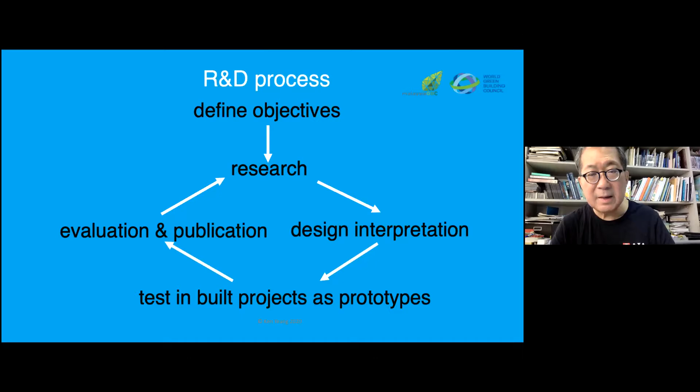Now, I see green design as the bio-integration of 5 factors. The first one is nature, which is seen as an infrastructure, and the objective is to design with net positive ecology impact. Second is human society, our social, economic, political system, and the goal is to design for a net happiness society.

Next is water. We try to design for net zero water without waste of water. Now, water—we have lots of it in the sea, but it's not potable, not drinkable. So we need to make sure that the water that falls on the ground stays on the ground, and that whatever we use, we try to close the loop.

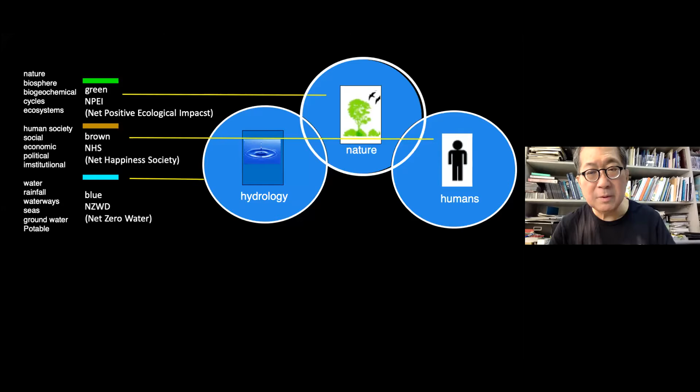Then there's our built environment, which is the infrastructure—the external infrastructure, and inside the building is also infrastructure, except that inside buildings it's hidden. This also includes everything that we make: our buildings, our bridges, our ports, our clothing, our food, and artifacts and things like that. And finally, energy, because we need energy for society.

Now, these are the 5 key infrastructures that we need to consider in ecological design. The challenge then is bio-integration—how do we bring all this together into a whole? And that, in a nutshell, is what ecological design is about: nature, our society, our built environment, water, the hydrology, and our energy systems.

Now let's look at nature first.

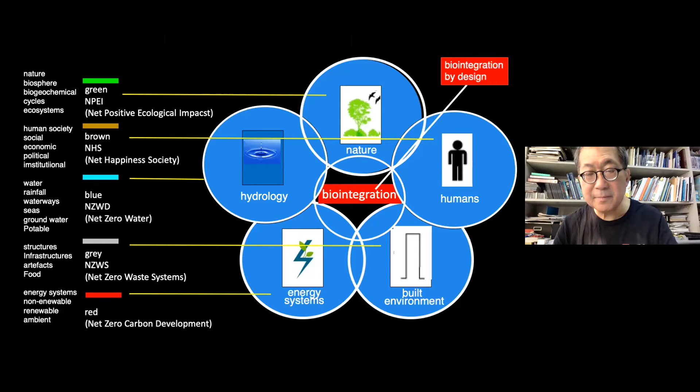Ecology sees the Earth as covered by a thin film, the blue color you see there, which is the biosphere. Within the biosphere, there are whole units in nature called ecosystems, which consist of communities of plants, animals, and the physical environment. Ecologists call this the biotic and abiotic constituents. In nature, everything acts together to form a whole.

Now, if you look at the room that you're in, or any city, whether it's New York, Tokyo, Singapore, or Kuala Lumpur, the biotic constituents are missing. This explains that the functions nature does for us—sequestering waste, emissions, producing oxygen—are absent from cities. We have little patches of green here and there.

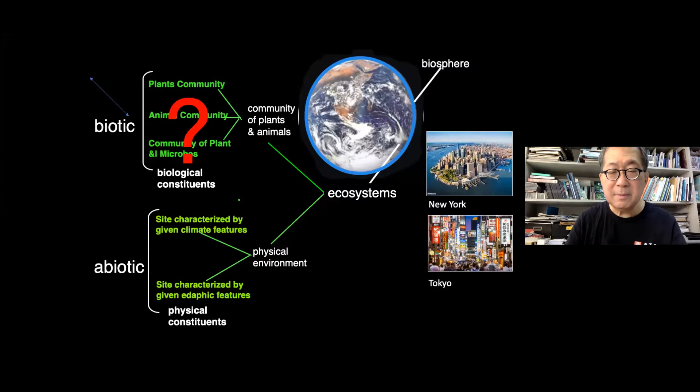In Kuala Lumpur, we have the Lake Gardens and a bit of the KLCC and so forth, but a good part of Kuala Lumpur has no nature. So if you're going to design our cities and buildings as constructed ecosystems, then we need to have the equivalent of this in our built environment.

The idea was that if our built environment is constructed, designed and built as a human-made ecosystem, then the biointegration is less arduous, less complicated. What we need to do is convert what we have today and try to build new buildings as constructed ecosystems.

Now, obviously, this is easier said than done, and it is actually the principle of what we should try and do.

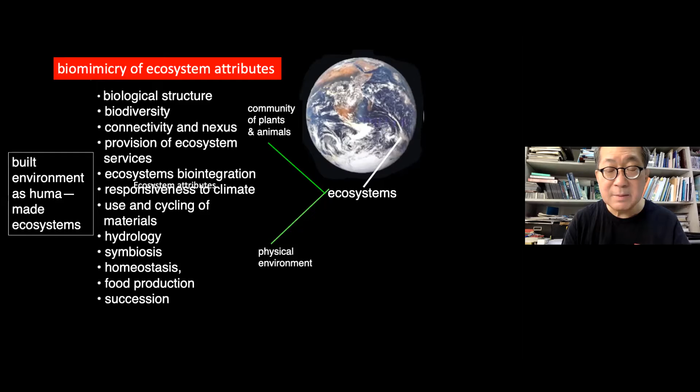So I start to look at how do we design the built environment as human-made ecosystems. I started looking at ecosystem attributes, and these are some of them: biological structure, biodiversity, connectivity, nexus, ecosystem service, and so forth. It's a long list, and I've been trying to do as much of this as I can in my research.

Now let's look at the first one, which is biological structure, which I discussed earlier on. These are some of the ways we can bring nature back into the city.

The first diagram is a centralized one where we put it all in one location, as in Central Park in New York. The second is a spotty, dispersed relationship, has a series of green squares, as in Georgian London, or you can see in the second diagram below, you can have patches of green all over the building.

The third is what I call a stepping stone. It's not quite connected, but close enough that species can move, but not all species, from one patch to another. The fourth is the spine, where you have a central spine and fingers sticking out. The fifth is ecological corridors with fingers.

Now, ecologists see the last one as the preferred one, because by being connected it enables species to move from one part of the green areas to the other, so that the whole system becomes an ecological system by being connected.

It enables a larger pool of natural resources within this ecosystem to be shared among the species. And the species, by having a larger pool of resources, is more stable, and as they're more stable, it has a greater potential for survival. So with that as the key diagrams, I started to use it to try and interpret this in my work.

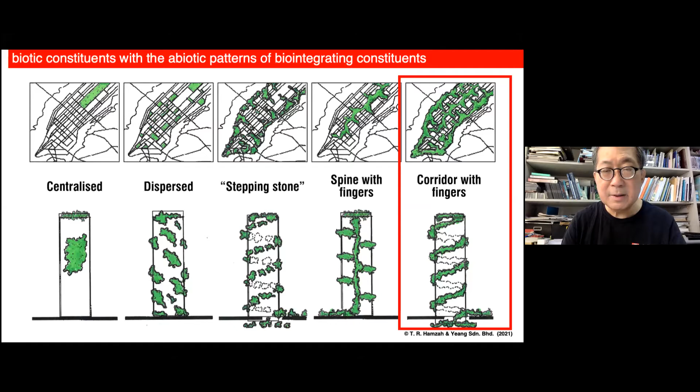Now this is the Solaris building that we completed around 2010. The idea was to have a continuous spiraling vegetation that goes from the ground in the basement going up to the top of the building.

This was a concept perspective I did to show how it could work. Now, if you just put vegetation on the outside, to service the vegetation you have to go through the floor. So I thought that's no good because people wouldn't like it. So what I did was provide a ramp next to it so that people can service the vegetation from the outside.

That's very important because it irritates people no end if, every time you service the vegetation, you have to get permission to go through the floor and bring the fertilizer, water, tools, through the window to get to the vegetation. But here you can service the entire vegetation from any part along the ramp. The ramp then becomes, if you like, a vertical linear park.

And if you extend the ramp horizontally, it's about 1.3 kilometers long, this building. So here it is, it's completed. It took me a year or so to get complete. You can see the vegetation, you can see the ramp, and people servicing, and the sun shading on top.

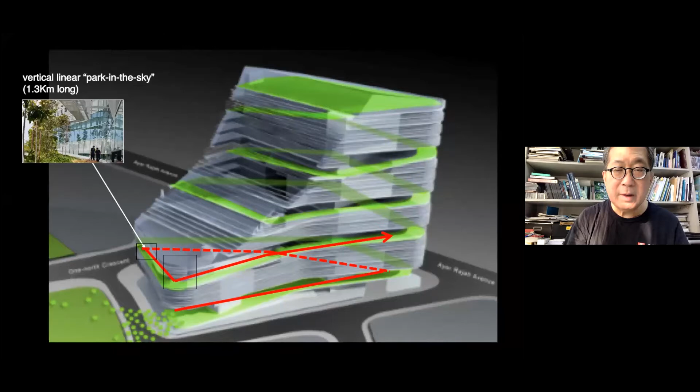The idea was to ramp all the way up the building. With every floor, with every facade, I could climb one floor. It goes continuously up to the top of the building. There are certain parts where the ramp is a little narrower, and inside and outside the building it goes up as well, one floor at a time.

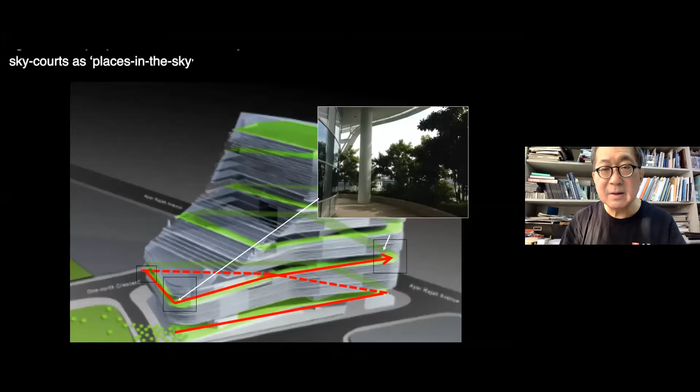As a linear park, I wanted to create places of respite. So at the corners, I have sky terraces so that people inside can go outside, and people on the ramp can have a little mini plaza. These are spaces for interaction, and it also avoids the monotony of a long linear corridor.

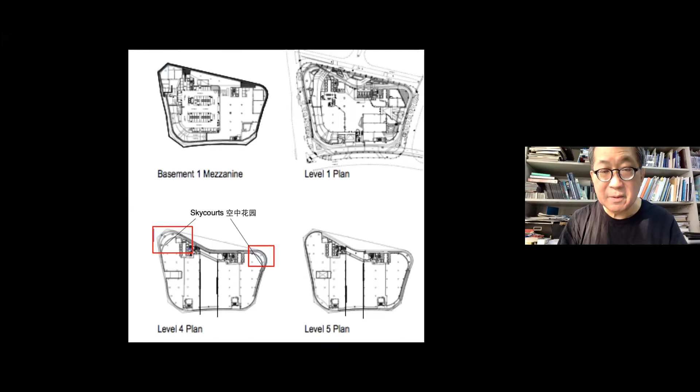At the corners, you can see in the red square these sky courts where the ramp joins the typical floor. Here's another view of the sky court at the corner. People go there for a smoke, to have breakfast, a meeting, or just to chat with each other—these are actually very nice spaces for people to use.

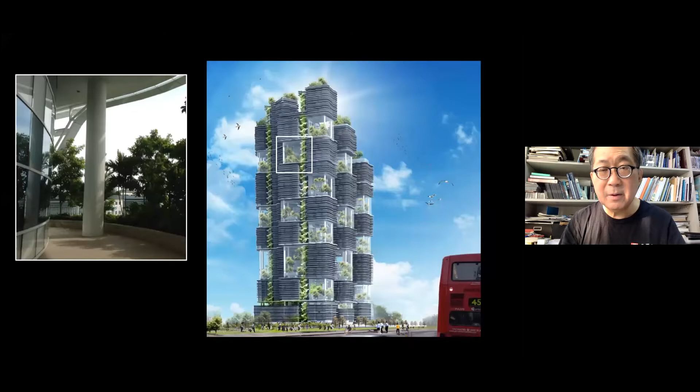On the right-hand side is a tower we are working on now in London, where we have sky courts that move, alternating between different parts of the building.

Singapore has this thing called the Vegetation Index, which is a ratio of vegetation to the ground area of the site. The requirement is 6, and we achieved 12.2, probably the highest in Singapore. This means that criteria like Green Mark, GBI, or LEED should be based on performance rather than just meeting a minimum, and we should try to exceed as much as we can—here we exceeded 6 by more than double, reaching 12.2.

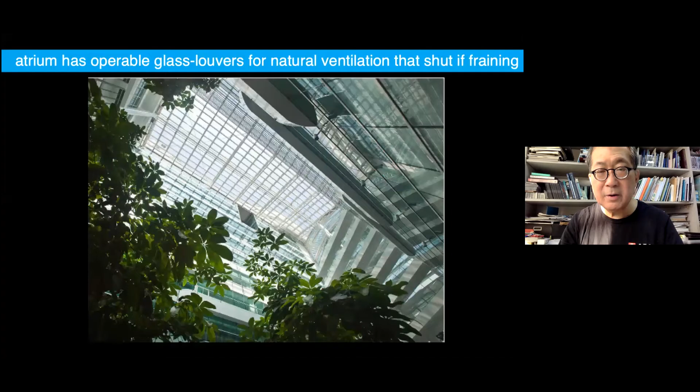The atrium is naturally vented, not fully air-conditioned, and not fully naturally ventilated either—it's what I call mixed mode, where some cool air is blown in. This reduces the air conditioning load for the entire building. You can see the atrium roof is operable: on a normal day we open it to let hot air out, and if it rains, it closes and seals the whole building from getting wet.

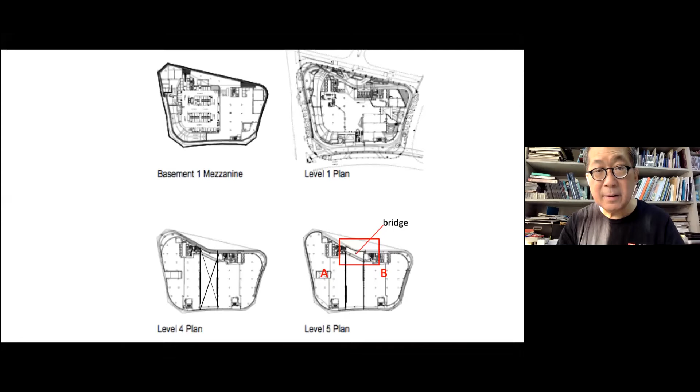That's the bridge. Another experimental device we adopted in this project is the diagonal light shaft. Most light shafts are vertical, but here I cut a diagonal shaft that goes all the way down to the bottom of the site, so that people walking down the street can look up and see the building, and people inside the floor can look down and see the street.

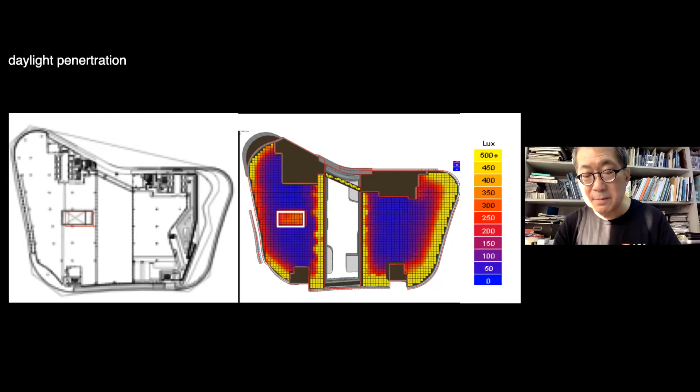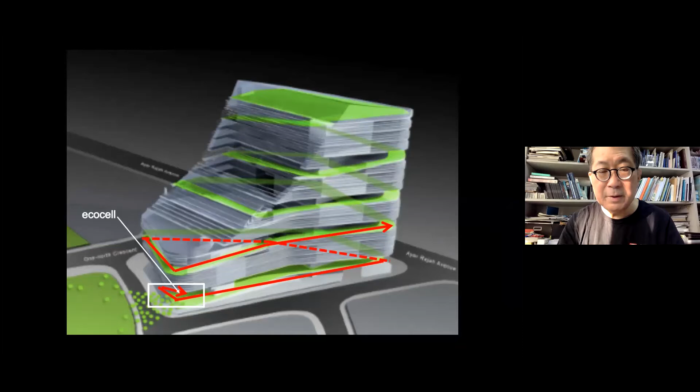At the bottom of the ground floor, we have what we call an Ecocell, which brings water into the lower parts of the building. So this is what the Ecocell looks like. And at the bottom, we have the water tank. Ideally, we could have a bioswale there to bring water back into the ground.

So now, connectivity and nexus is one of the ecological attributes. In nature, everything's connected, whether overtly, inadvertently, or inexplicitly, and we should try to enhance this connectivity. What human beings do is that when we enter a site, we chop it up, fragment it like cutting a cow into a burger, and the connectivity in the habitats is lost—we fragment the land with impervious surfaces, fences, and buildings. So one of the things we need to do with any city, with any building, is try to enhance its connectivity.

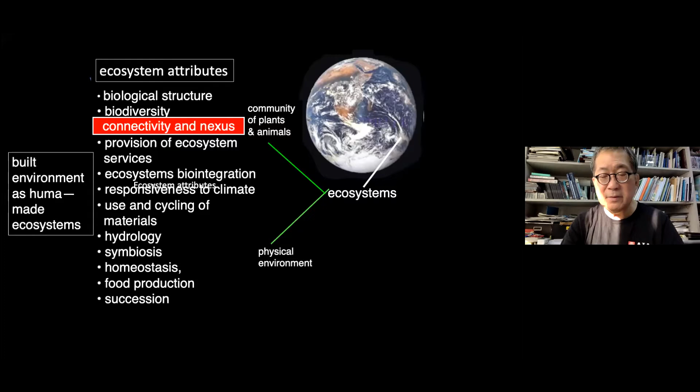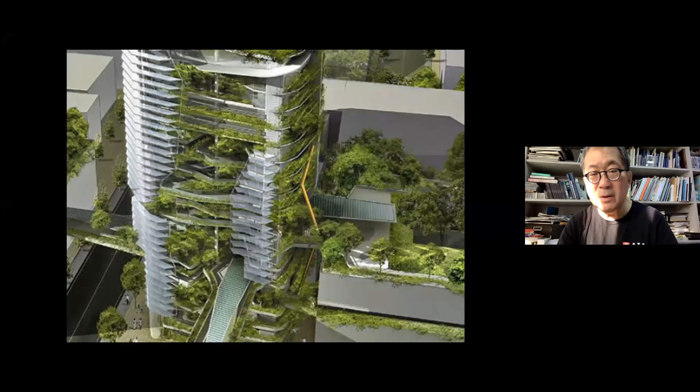And this is the plan showing the continuity of the vegetation going all the way up. The idea was that whenever the vegetated ramp reaches the same level as the roof of the adjoining building, we bridge across to the roof and green it, so that the building becomes the catalyst to make the city green.

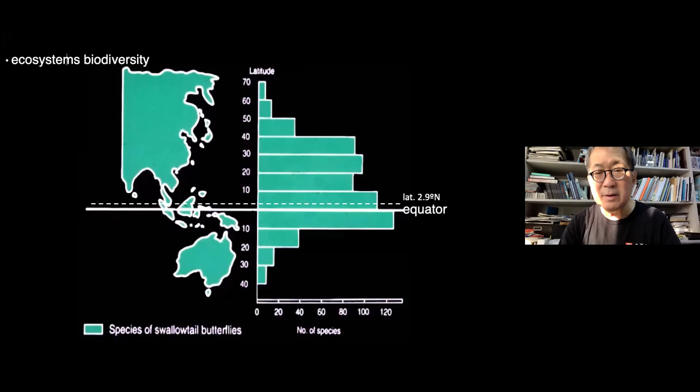So we started to develop ways to enhance biodiversity, and this is what we call—developed with ecologists—the Biodiversity Matrix. Let me explain what this is. The first thing we do when we design any building, project, development, or master plan is to create habitats within that development. It can be on the ground, underground, on the walls, in the sky courts, or on the roofs. So creating habitats is very important.

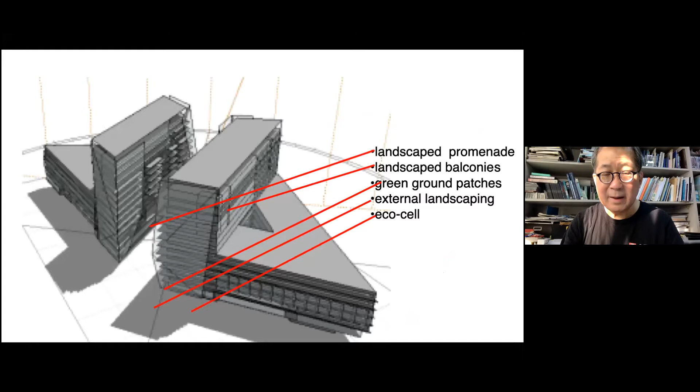So these are some habitats in this project in Putrajaya. The project is really two almost symmetrical buildings, bifurcated by the axis to the Millennium Monument. Here it is—it was completed about three years ago, and you can see the habitats on the facade and the sky court. This was before the vegetation was fully grown, and there's vegetation on the ground.

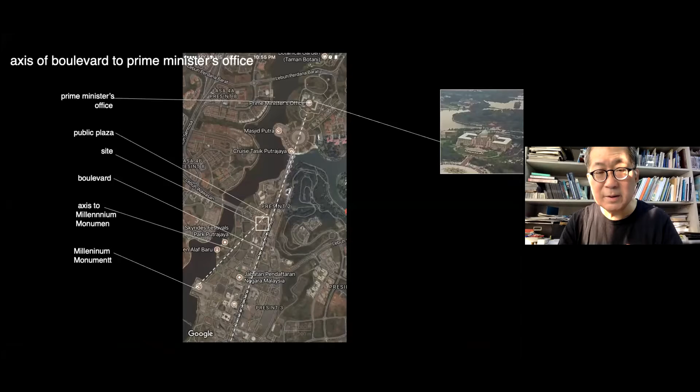The site is determined by two main axes. The first is the boulevard leading to the Prime Minister's office. The second is the axis from the square, the Dataran Merdeka, down to the waterfront, where the monument is. With these as determining factors, we started to shape the building, and you can see that the axis down to the monument slices the site into two. Just next to it is the new Putrajaya building designed by Philip Cox, and you can see the Prime Minister's office building along the boulevard. This is the axis—so the axis cuts the site.

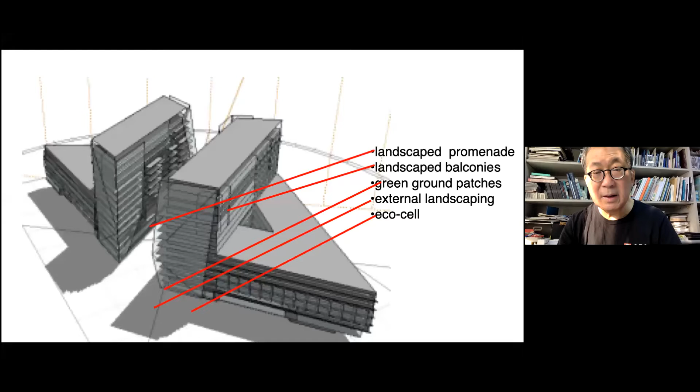Now, the space between the buildings, we created a pleasurable zone where people can sit, and we have vegetation on this area. Again, the habitats are in this location. So these are the habitats we created in the development.

You can see there's a plan, and the red color shows the habitats. The first thing we did was to select what fauna we want to bring back to the location, because the site was just ravaged, cleared, and red earth, cleared of any living life except the microbes in the ground. With this plan, because of the shape of the site, we had two almost symmetrical buildings with a promenade in between, each with their own drop-offs and an atrium between.

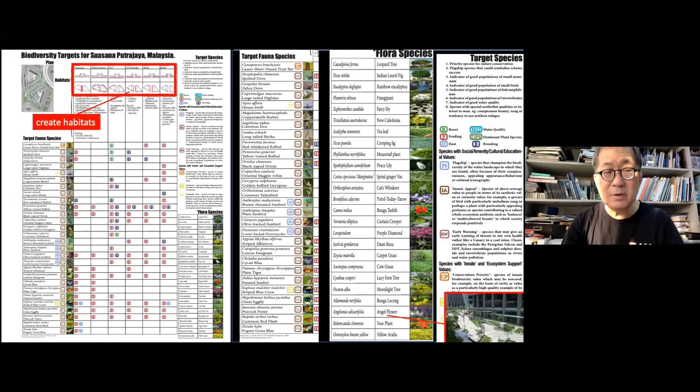So the first thing we did was create the habitats. Next was to identify the species of fauna we want to bring back into the project, which are not hazardous to the people in the locality. After that, we try and look for the flora that will attract the fauna - the fauna will not just come, we need flora that attracts it. Then we look at the interaction between the habitats, the flora, and the fauna, and that becomes the basis for designing the habitats and landscape areas.

So this is what we call the biodiversity matrix, and this is what makes the project ecological, taking ecological green design to the next level. This was done as a collaboration between ourselves, the ecologist, and the landscape architect.

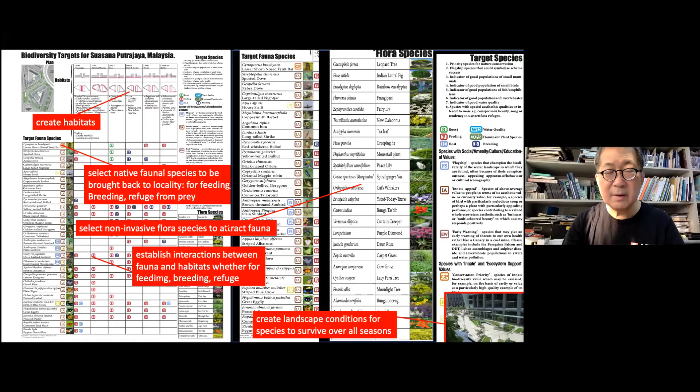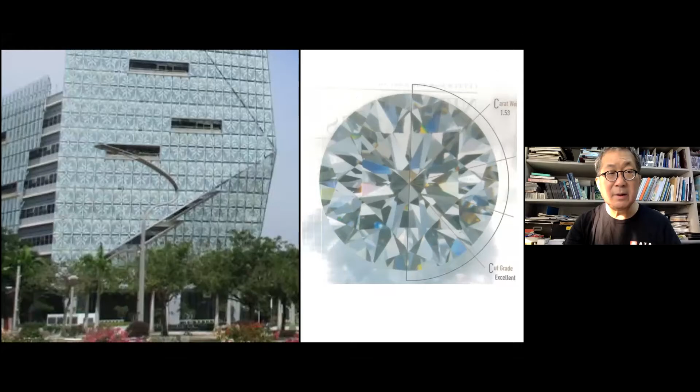Now, this interesting bit of facade - we wanted to create a faceted facade as a high-end looking facade, like a diamond, like a gem in the locality. Hence its faceted shape. But we wanted to break up the facet, so we sliced it, cut voids in the slices, and took sky courts in between. And between the outer skin and inner skin is a walkway for servicing.

But you can see the panels are not butt jointed - they actually have an air gap so this becomes like a flue for air that flows through and cools the facade. Here it is, you can see the slicing of the facade and the sky courts.

Now the pattern is what we call a songket pattern, to express the Malay culture, reminiscent of the songket fabric. We could do more, but we just took the pattern as the basis for reflecting the culture of the country.

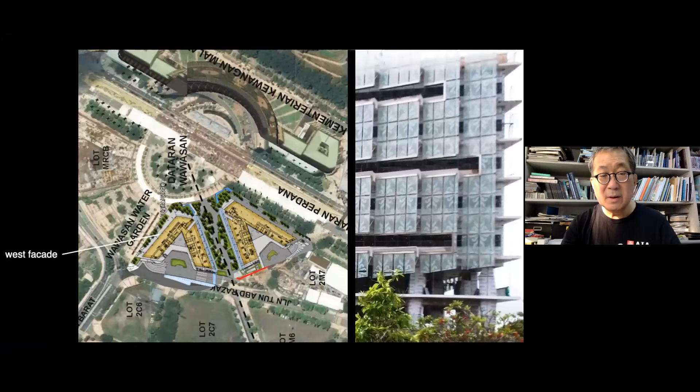So here it is, and on the right-hand side is the west facade. We shaped the west facade to keep out the western sun, so it's not exactly flat. This is the entire west facade, which is actually quite interesting. You can stand at the sky court and look out and see the highway on the other side of the river.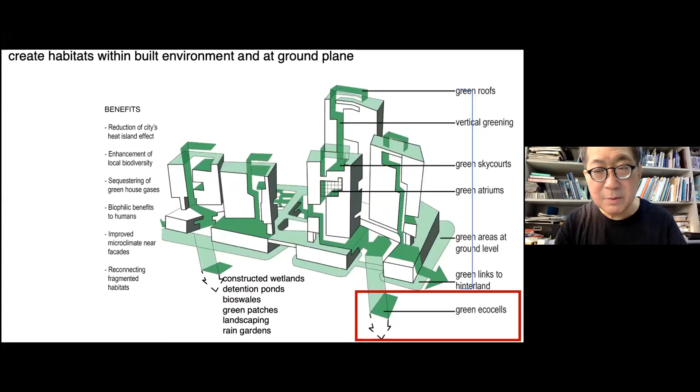So again, here we brought the habitats all the way down to the ground, into the basement, using what we call the Ecocell. It goes down from the third floor vegetation, weaves its way down to the bottom, and hits the basement, bringing natural ventilation, water, and daylight into the lower parts of the building.

The vegetation idea, the Ecocell idea, started maybe about 10 years earlier. This was a competition scheme for the Kowloon waterfront. It was a controversial scheme, and the controversy is a separate story altogether. But anyway, I think we got honorary mention and not the first prize. But the idea of the Ecocell started in this building.

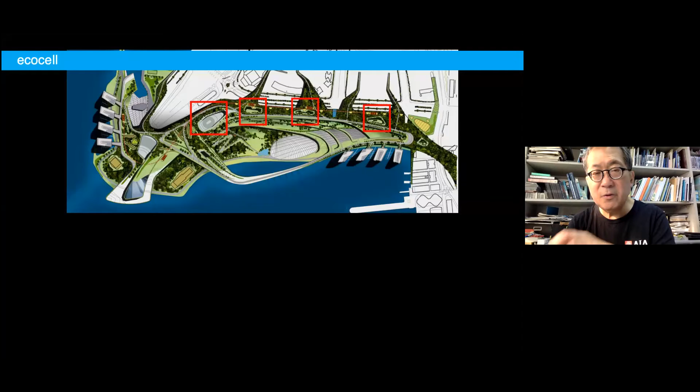The podium - we cut voids going all the way down to the basement, and the voids do a number of things: bring vertical integration into the lower parts, opportunities for rainwater harvesting, natural ventilation, and daylight penetration. At the bottom, we could have a bioswale or an eco-machine, the ones that John Todd invented. So this is the function of the Ecocell.

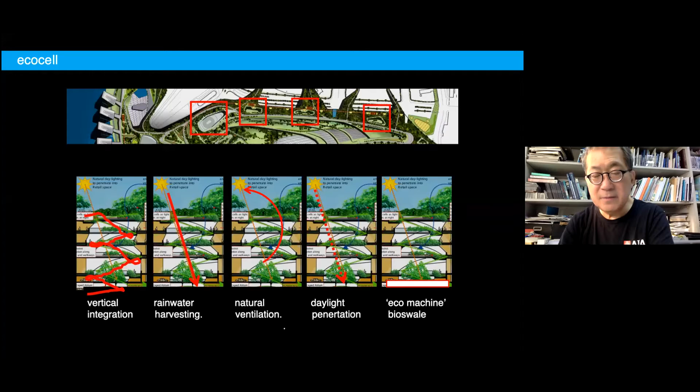Now then, how do we address this with the vertical building? How do we create habitats within the vertical building? Early on, the principle was to link everything together horizontally to create an ecological nexus. People sometimes ask me, how do you make Kuala Lumpur green? And I said, the first thing you need to do is create more green areas and connect them, because that creates an ecosystem within the city.

And so that was the idea. But when you hit the base of the building, you should try and bring the vegetation all the way up. So the idea was that we should extend the vegetation vertically into the sky.

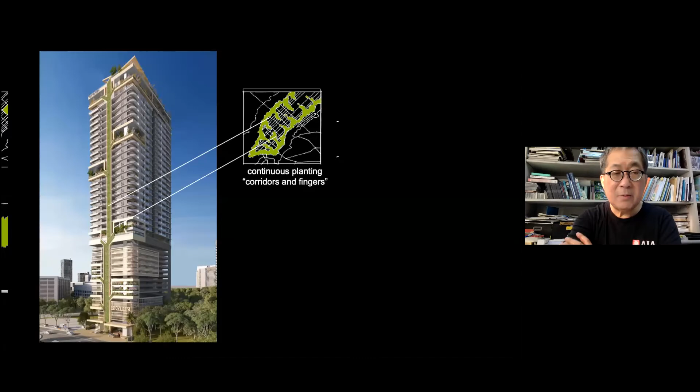This is a building under construction now, which has a green wall as continuous planting going up. When it hits certain levels of the building, we have a sky court. These are spaces for respite for the users.

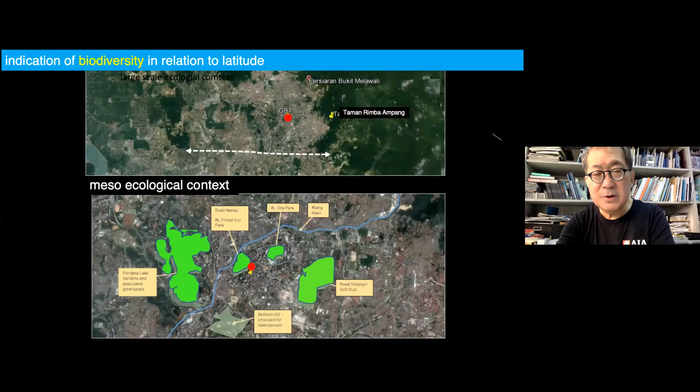So the approach was to bring back birds and invertebrates into the site—invertebrates being species with no bones. For the lower floors, we designed it for butterflies and dragonflies, choosing species that will attract them. For the middle areas, we have spaces for songbirds, and the top area would be a space for migratory birds.

That flows across the site. But it's important to have a water feature because water attracts birds to the different zones.

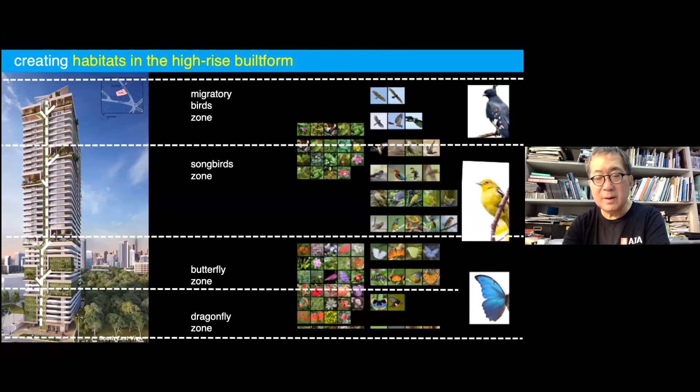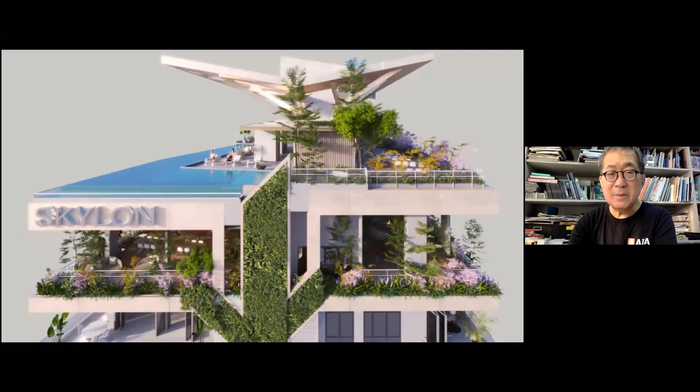So this is the biodiversity matrix for the project, and you would use that—that's the top of the building with the infinity pool. This was the basis on which we designed the landscaping and the planter boxes in the building.

Now, next is the provision of ecosystem services. I'm sorry, I doubled the word provision there.

Ecosystem services is something that ecologists concluded around the year 2000—a list of things that nature does for us without any human intervention. This is very important because the more we cut nature, the more we make nature homogeneously abiotic, the more we lose the potential for ecosystem services. These are the things nature does without any human intervention.

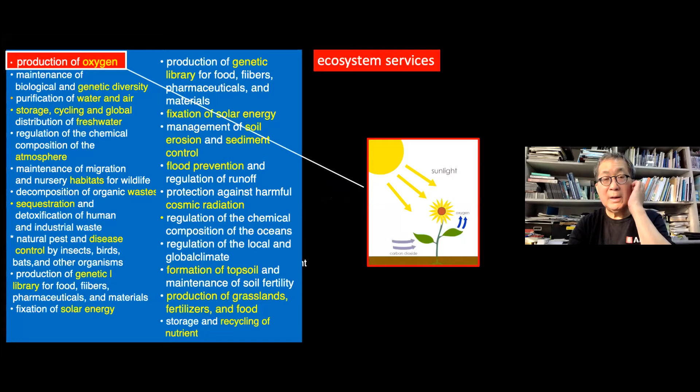If you look at the top left-hand corner, there's the production of oxygen. Nature, through photosynthesis, produces oxygen. Nature also absorbs and sequesters pollution from the air. Now, we didn't ask nature to do this—nature does it for us without any human intervention.

So you can see the importance of putting greenery in the city, of making our city as biotic as possible, of redesigning and changing our city so that we have nature to balance the pollution we emit into the air, and to create oxygen for a healthy environment.

And so the idea occurred to me that this is too big a task for us to do. We can never replicate what nature does with photosynthesis—it's a huge effort. We can never replicate the sequestering of contaminants in the air. So the idea was then to create habitats woven in close proximity to urban areas.

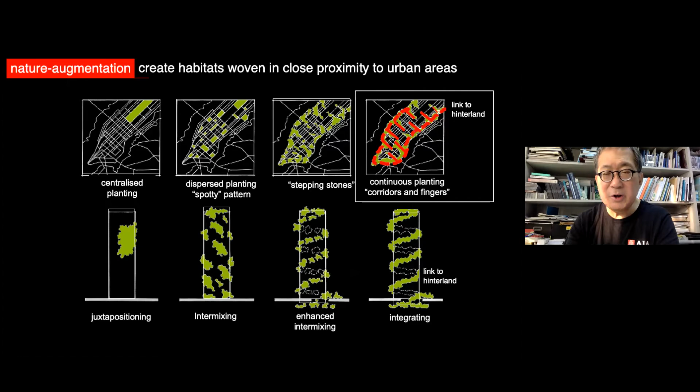I call this nature augmentation—using nature to augment the capability of a locality to provide ecosystem services. This is extremely important, because without it our cities become contaminated, unhealthy areas for people, and very soon there won't be any vegetation left on the planet at the rate we are building, changing, and cultivating land for all sorts of purposes.

So the idea was to weave the green corridors and green areas with the built-up areas in a sort of clasp-hand concept. You can see the ecological fingers that stick out into the sea, and the ecological corridors that weave inland into the green context.

This is a project master plan we did at the island of Reunion, which is east of Madagascar, and it's a French territory.

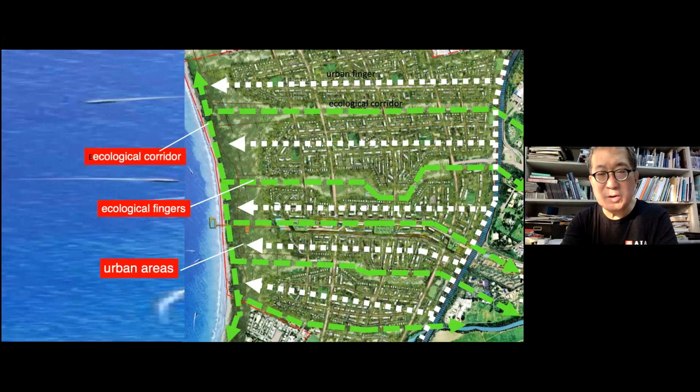So the idea was that we collect all the species at the waterfront, because the buildings have to be set back a certain distance from the waterfront. And then we bring it through a series of ecological fingers, and the urban fingers then go all the way down towards the waterfront. So you can see that...

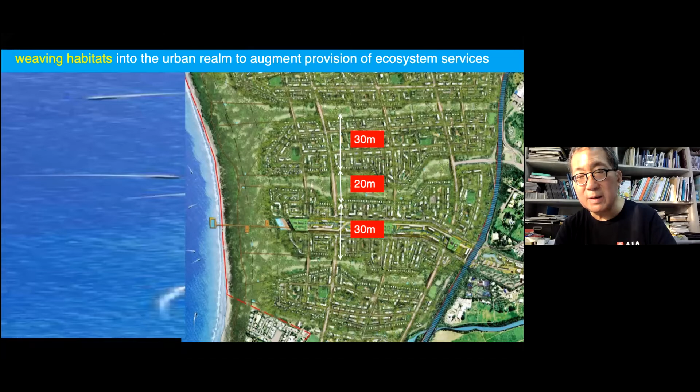But here it's cheek by jowl with the urban areas right next to it. We thought about 30 meters would be more effective, and the green fingers could be 20, and so forth. And the edges should be serrated, not pristine, because species like serrated edges—they can hide, they can breed, they're less exposed, they're protected.

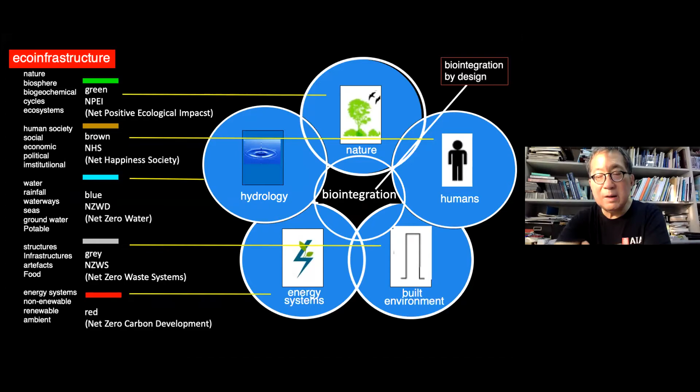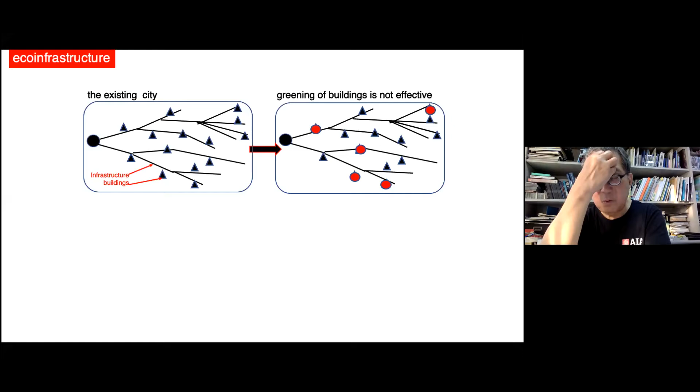Because if you have a building where the water comes from the ground source, or the energy comes from burning coal, and so forth—what it means is that we should start with the green infrastructure, not the green building. Then anything else we add to it can become potentially greener. So this is a very important idea: that green architecture is not designing green buildings alone, but designing the green infrastructure. That is what we should start with.

This is the master plan we did in Bangalore, India. There's a forest reserve on the west side of the site. The first thing we did was try to link all the vegetation together into a master plan, into a spine, and then stretch the spine across the site—that's the ecological fingers. So the scheme is to bring it right to the edge of the site, hopefully extending to adjoining sites. That's difficult to control; it's up to the authorities to insist on that. But that's a start.

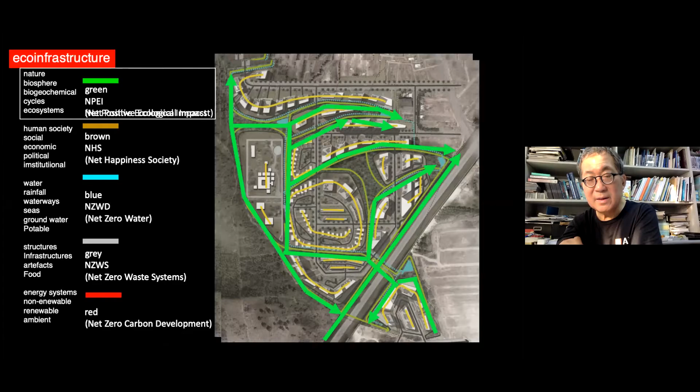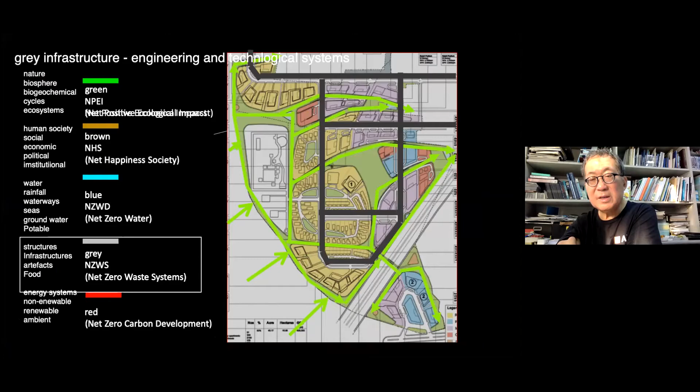Here's the water infrastructure, where all buildings have a water system that they're connected to. And here's the energy systems, the red energy systems.

For hydrology, the white squares show the detention ponds where surface water is retained on the site. We should try to close the loop as much as we can within the built system, and if it discharges outside, it should go back to the ground to recharge the groundwater. On the right-hand side are different means of doing this: infiltration planters, permeable paving and rain gardens, infiltration bioswales, rain gardens, or stormwater wetland areas. That's very important, because if you don't, the water goes to the drains and into the sea—it's gone forever, we can't use it.

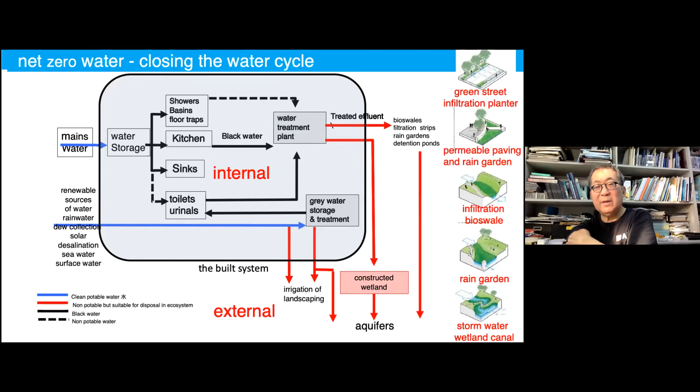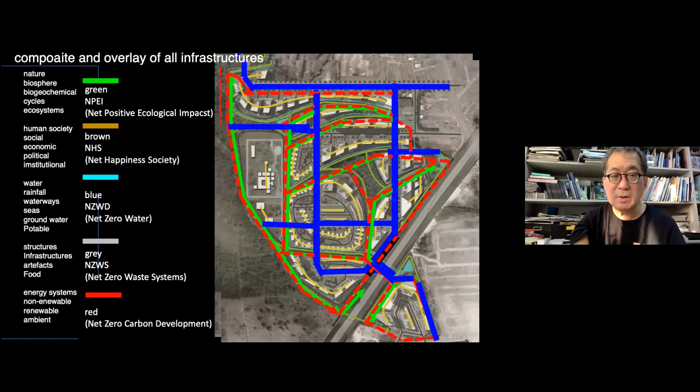For the black wastewater, we propose constructed wetlands, so the gray and black water can flow from one pond to another, and by the time it reaches the bottom, it is almost potable. So in a nutshell, this is a schematic concept of how we could bring all these four infrastructures into a whole. It's not perfect, but we're still working on this.

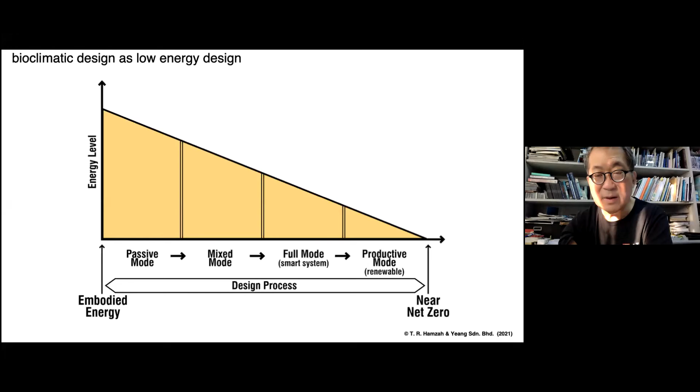Now, with this quick summary of the different ways of reducing energy, if you look at the graph, you start with passive mode. That means improving energy conditions without any mechanical electrical systems. Number 2, the next stage is mixed mode, then full mode as smart systems, and finally productive mode, which is renewable source of energy.

For temperate climates, this is what the comfort profile looks like. The engineers insist that we have a consistent temperature, humidity, and air change throughout the whole year. This is the red color line. The blue shows the comfort conditions in winter, when it's cold, and in summer when it's hot.

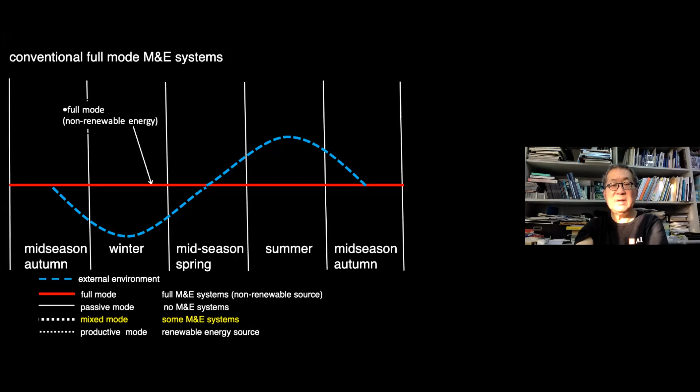Now, by using passive mode, using bioclimatic design, we can improve the comfort conditions without use of any mechanical electrical systems. But you can see that it's a long way off from the red line. You can never replace mechanical systems, high energy systems, by passive mode. We can improve it a little bit, but not that much.

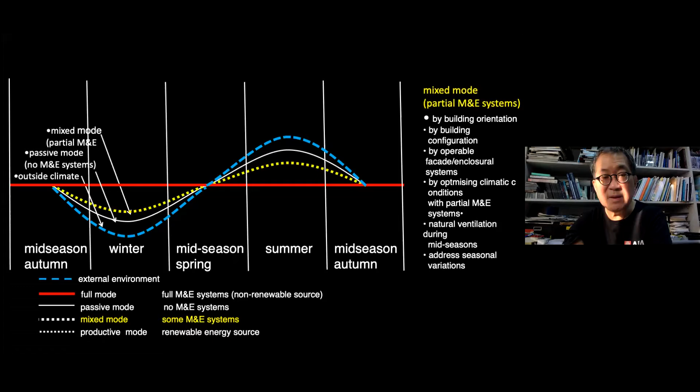The next is to use mixed mode. Mixed mode means some mechanical electrical systems, just like, for instance, passageways can have ceiling fans instead of air conditioning. Toilets can use ceiling fans, and so forth. This is mixed mode, some mechanical electrical systems. Here is what I call environmental mode over the mid-seasons.

Then the next would be productive mode. Productive mode, where you generate your own energy through using renewable sources of energy.

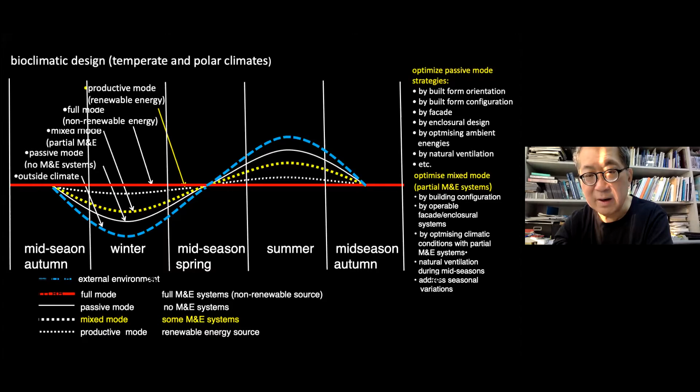Here's an example of a project in London, in a temperate zone. In a temperate zone you have two opposing seasons: a very cold winter and a hot summer. In between, you have mid-seasons like spring and autumn, which are very nice seasons. So the idea was to try and reduce the need for air conditioning in summer and the need for heating in winter by extending the mid-season. By extending the mid-season through natural ventilation, it reduces the period for cooling and heating during the summer and winter months.

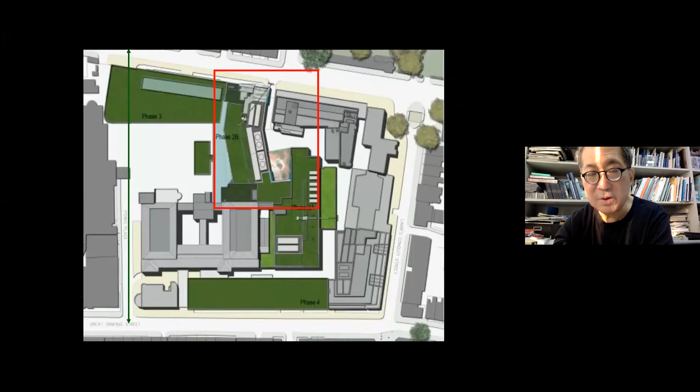Now, the way to do this is to use a mixed mode system. This was the design for the extension of the Great Ormond Street Children's Hospital. Here we created a flue on the facade that sucks up the air from the lower 3 floors, so that this reduces the heating and cooling in the summer and winter months.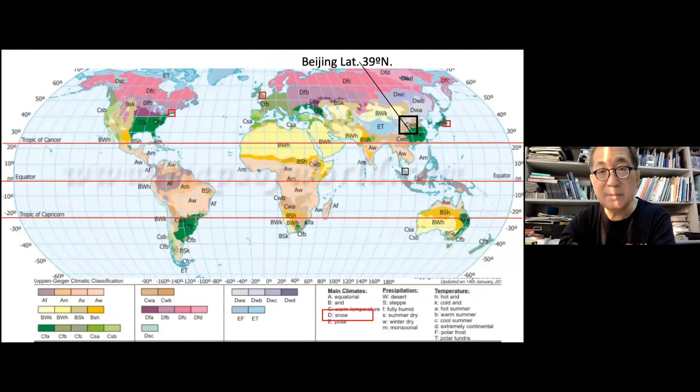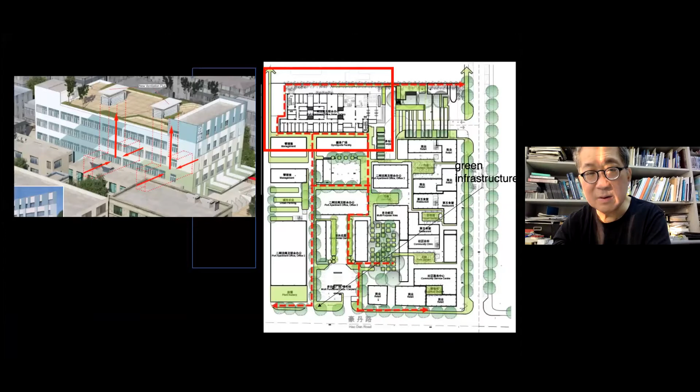We did the same thing for a project in Beijing, at latitude 39 degrees north, in the district of Xiong'an, where the new capital city will be. It's the renovation of an existing building. What we've done is cut voids at the ground floor, doing the same thing to create natural ventilation and extend the mid-seasons. You can see in the bottom left the voids cut into the floor, creating an atrium with a continuous wind flow to the roof, and on the far right is the simulation of the wind flow.

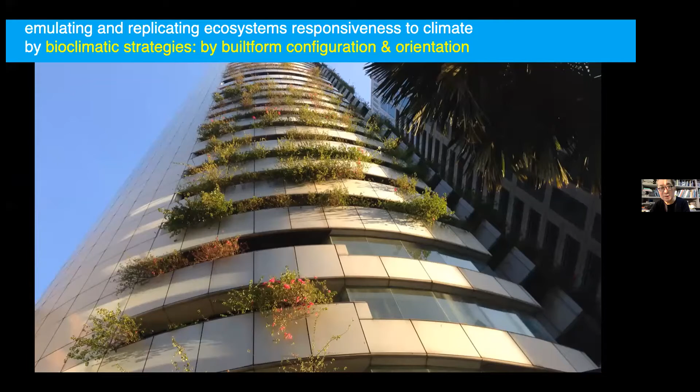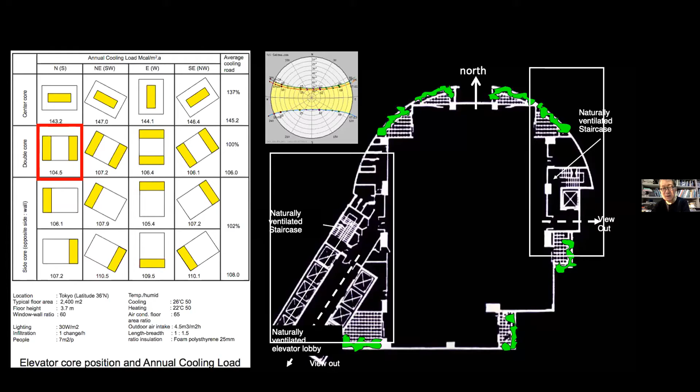And so this is one way of configuring the building to reduce energy consumption. Now this is an idea I had, which is what I call a canopy building, or an umbrella building - my golden chalice, if you like, of a bioclimatic building. The umbrella is very cybernetic: if it rains on one side, you shift it to that side; if the sun's on the other side, you angle it instantaneously; if the wind's on the other side and you don't want it, you angle it and drop it a little bit. So I call this an umbrella building, and we need to find ways to do this in the tropics.

Of course, I've done, as you can see, the Solaris building, where I have automated the louvers. But ideally, the whole canopy itself should be movable if we can.

So this was a design for a station. And this was our entry for the University of Malaya campus master plan.

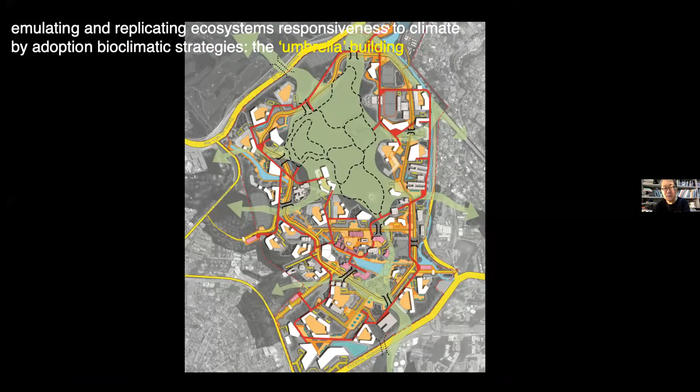We got first prize for this competition, but somehow they didn't come back to us to design it. I think the in-house architecture faculty wanted to do it, keep it to themselves, I suppose.

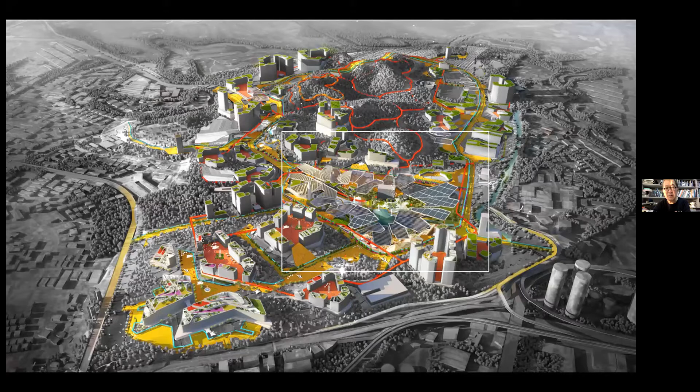Anyway, that's the hub. We created suggested the hub should have again a canopy over it with fritted glass, just like the one we used for Putrajaya. And so this was the canopy over the university hub. Here's the detail of the canopy.

Here's a design for a canopy over a station in Beijing, in the Xiong'an district. And here's the top view of the canopy, and this is the continuous vegetation through the canopy.

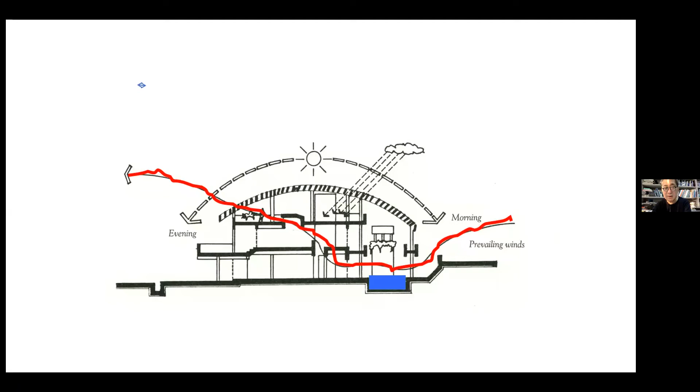And this is the roof house in Ampang with a louvered canopy that lets in the morning sun, keeps out the afternoon sun, keeps out the midday sun and the evening sun. And there are voids to let the swimming pool become an evaporative cooling device through the building.

Here's the louvers over the swimming pool area with a viewing canopy, a viewing platform. And this is the plan of the building - you can see you have natural ventilation: north, south, east, and west. It's all openable, so the outside walls are glass walls that you can adjust to control the ventilation coming in.

So the building then becomes, if you like, a living valve - a passageway through the building. Of course, this was done back in 1986, that's nearly 30 years ago. And this is the through passage through it.

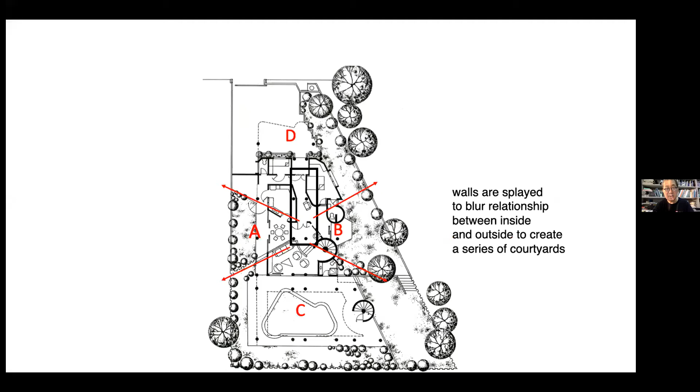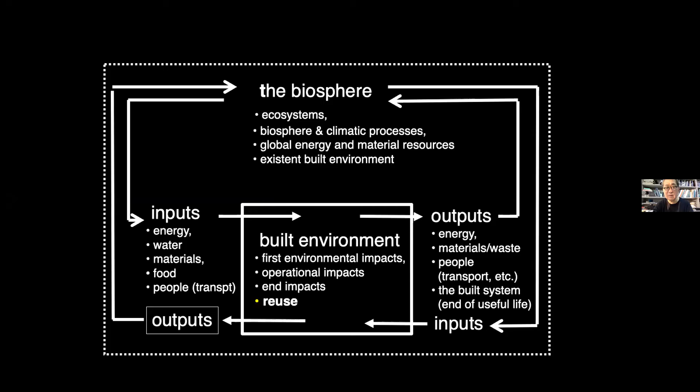In principle, in the tropics, in Kuala Lumpur, for a building to be energy efficient, at least 60% of the floor area should be photovoltaics. And in the use of cycling materials, we try and close the loop as much as possible.

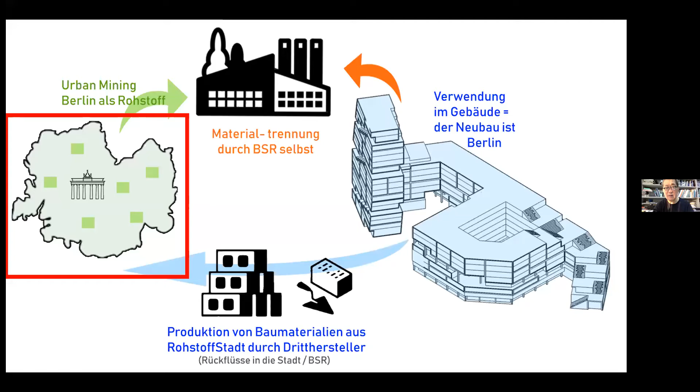Here's the building we designed in Germany, where the idea again was to bring vegetation all the way up to the top of a tower, and materials had to be recycled, where waste materials go to a recycling plant in the city, and then after its use is recycled again.

These are different stages of recycling, from extraction from the planet down to materials processing, product manufacture, and finally end use where it's recycled. And that's the master plan for the site.

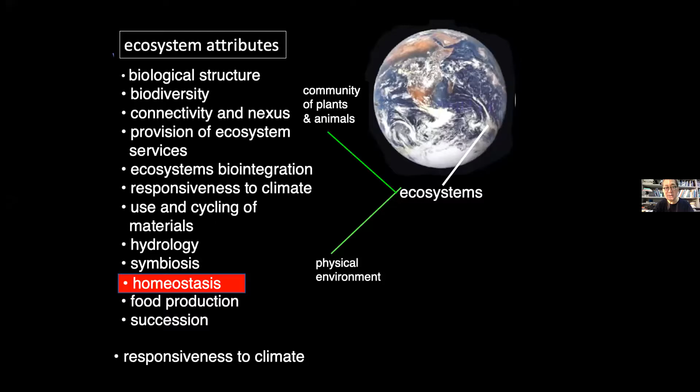And homeostasis, where there's a feedback that we should monitor the ecosystems on the Earth. The idea was to use satellite systems and sensors throughout the whole planet to recycle the Earth, to monitor the state of the planet.

And succession - I'm still working on this - is that ecosystems go through a stage of succession, and I still have to find the solutions for this.

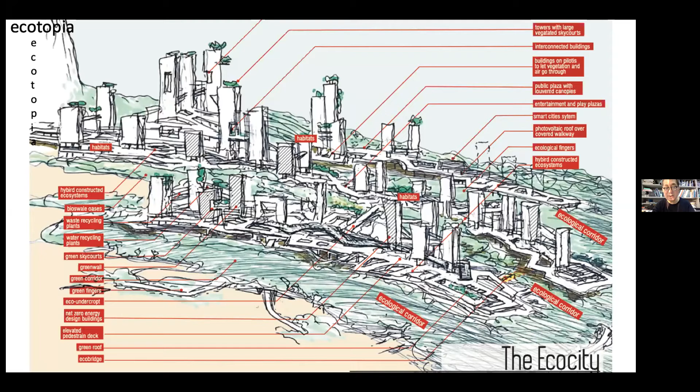And this is my diagram of what the eco-city could look like, Ecotopia, with the vegetated roofs, the roof gardens, the green bridges and eco bridges, the Ecocells. These are two aspects I haven't fully worked out yet, which is symbiosis and food production. And this is a diagram that drives our work that I mentioned.

Now, here's the question - I'm going to end in a minute. What happens if we get everything right? We are able to ecologically get the nature, the water system, the structures, and everything right. What happens if we, as human beings, don't behave ourselves? So that's the last one: human beings. If we waste materials, build all sorts of things, we waste energy.

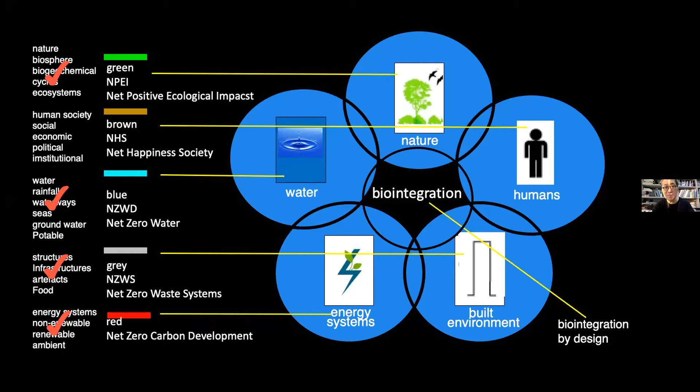So the ecological future is not just about architects designing, not just about creating eco-cities. It depends on people. If people do not behave properly, do not live an ecological life, if we continue to eat red meat and so forth, then what's the point of designing green buildings if the people who use them are not green? So this is my final message to all of you: if we are to have a sustainable future, it's not just architects designing green buildings, but people making themselves have a green lifestyle.

That's it. Thank you. Thank you.